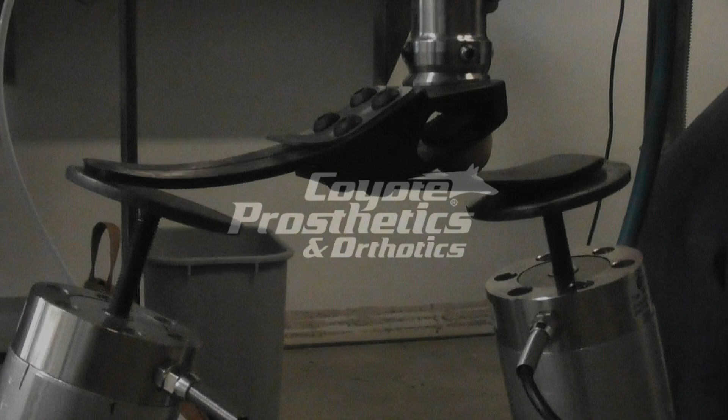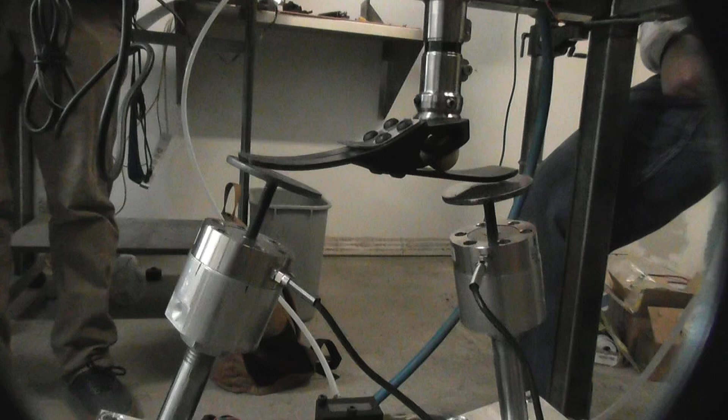Coyote Prosthetics, a Boise-based prosthetics manufacturer, needed an affordable solution for structural testing of prosthetic feet to meet ISO 10328 standards. These standards are vital to ensure the safety and durability of prosthetic devices, protecting against potential injury and litigation. Outsourcing this testing to third-party facilities was cost-prohibitive for the company, prompting the development of a custom-built testing machine.

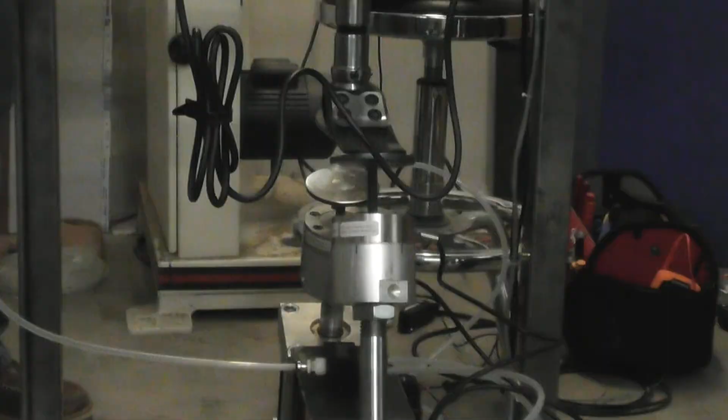This machine incorporates linear actuators to apply static and cyclic loads and uses a microcontroller with Arduino interface to log data on force and cycle count. The design offers a cost-effective in-house solution for testing various prosthetic foot sizes, significantly reducing testing expenses while enhancing operational efficiency.

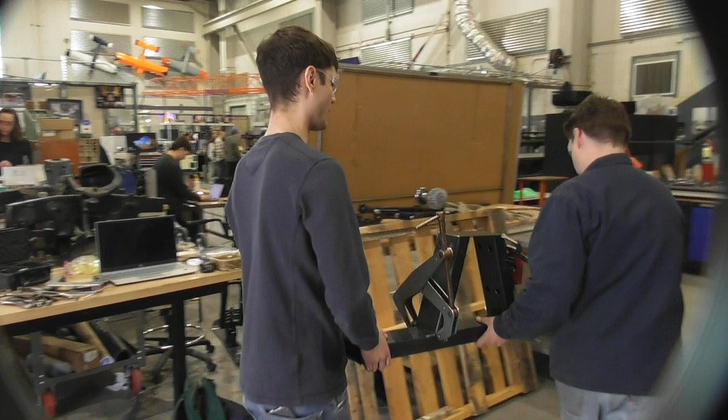To ensure durability over 2 million test cycles, we built the frame using welded steel box tubing, designed to withstand high vibrations and loading forces. Our design accommodates various prosthetic foot sizes and testing forces through multiple adjustable components. The mounting rod can be repositioned, the actuator stroke length is adjustable, heel and toe plates have multiple levels of adjustability.

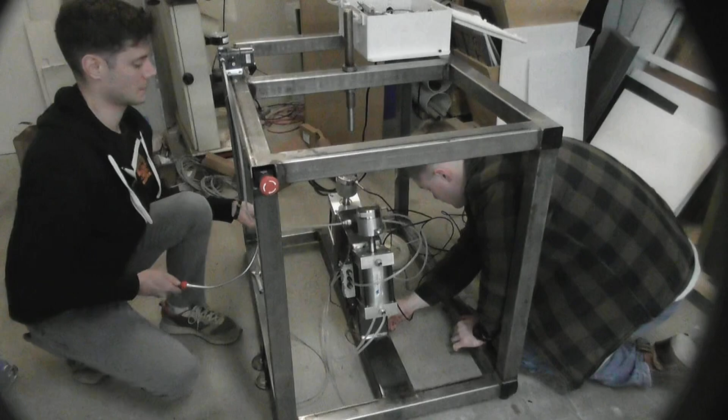Additionally, we designed the frame with extra space to prevent components from being crammed together, allowing for easier maintenance and adjustments. The overall frame dimensions are also within the size limits specified by our sponsor, Coyote Prosthetics. Our design implements an Arduino Opta PLC that allows analog control of our industrial components and supports feedback from onboard instrumentation such as the electronic pressure regulator and 2 piezoelectric load cells.

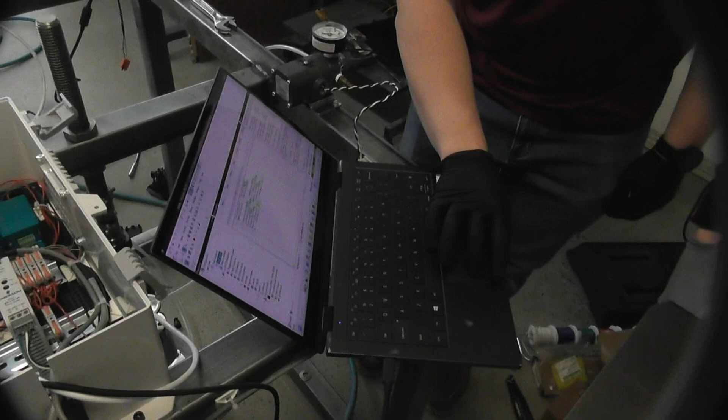To maximize the capabilities of an electronically controlled system, we additionally opted to use electronic double-acting solenoids to provide control capabilities to our pneumatic actuators. The selection of these components gives us the greatest flexibility to include data logging, precise control, and test validation throughout the life cycle of the device. The human-machine interface software, Ignition, grants the user the option for complete hands-off automation or more direct hands-on operation of the machine, depending on their preferred testing criteria.

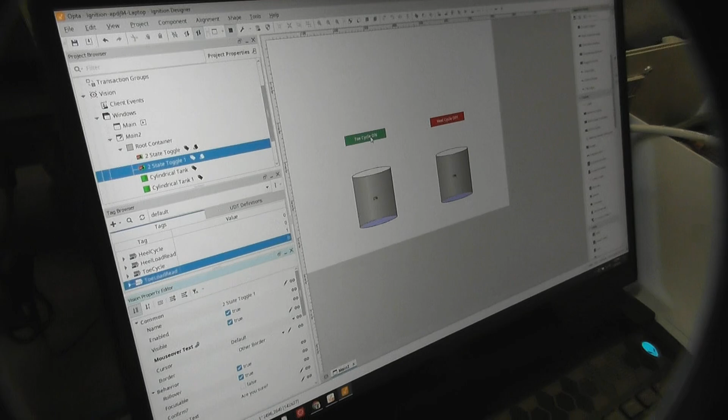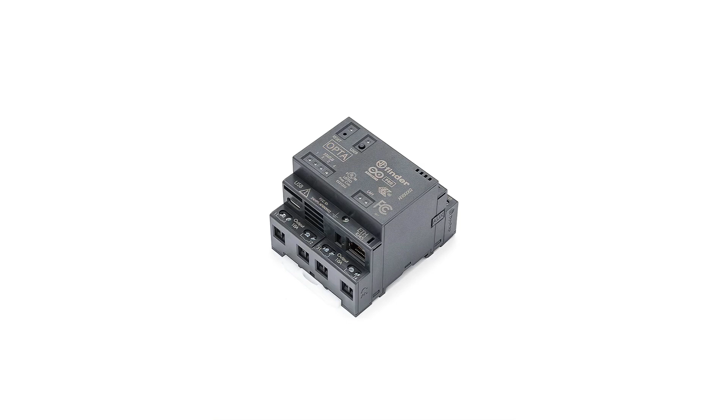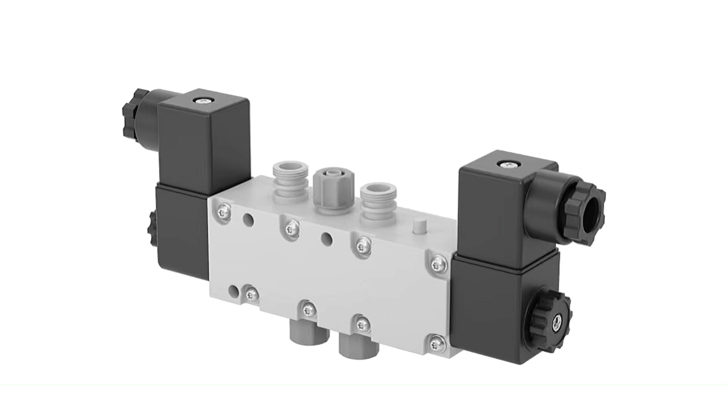Our main driving components that are able to make our device run consisted of pneumatic actuators, load cells, and an Arduino PLC, with of course additional supporting components. Pneumatic actuators provide forces that are applied to the prosthetic foot via compressed air. Load cells read and send the forces measured back to the PLC. Solenoid valves control the airflow to the pneumatic actuators by using an electrical signal to open or close the air supply, allowing for precise regulation of force application during testing.

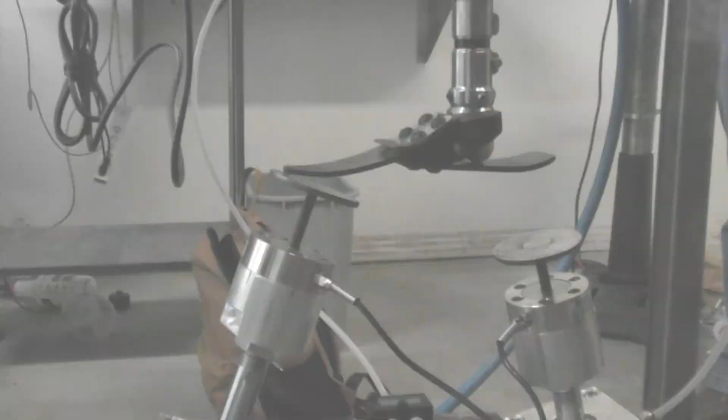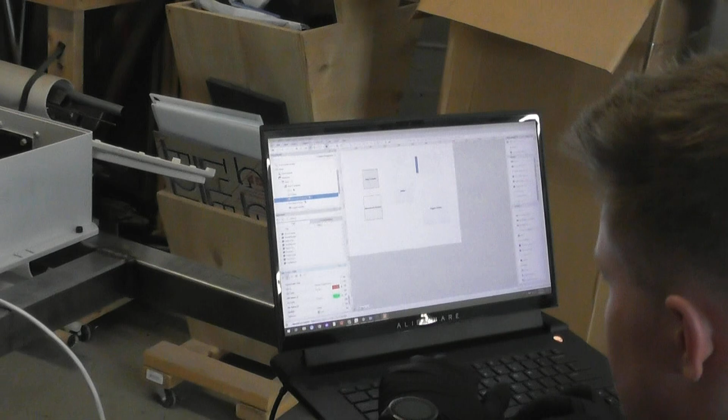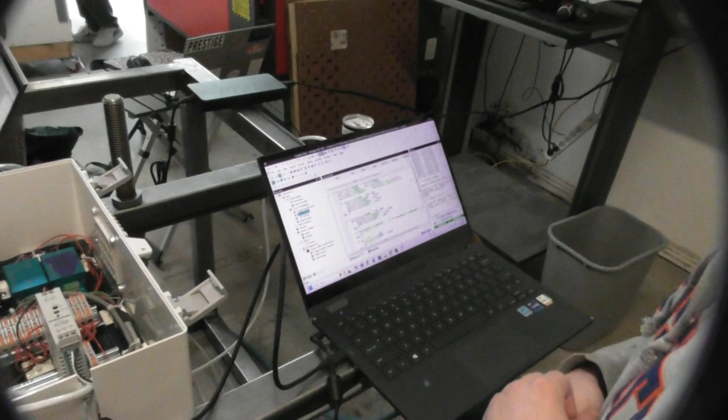Air regulator maintains a consistent and adjustable air pressure to the pneumatic actuators, ensuring precise force application for accurate and repeatable prosthetic foot testing. The Arduino Opta PLC with an analog extension, paired with Ignition for a human-machine interface, creates a powerful and flexible automation solution. This PLC delivers reliable control with digital and analog I/O for seamless integration. When combined with Ignition's web-based HMI, users gain interface monitoring, remote access, and control. This setup ensures efficient data tracking, actuator management, and alarm handling, making it a high-performance solution for industrial automation.

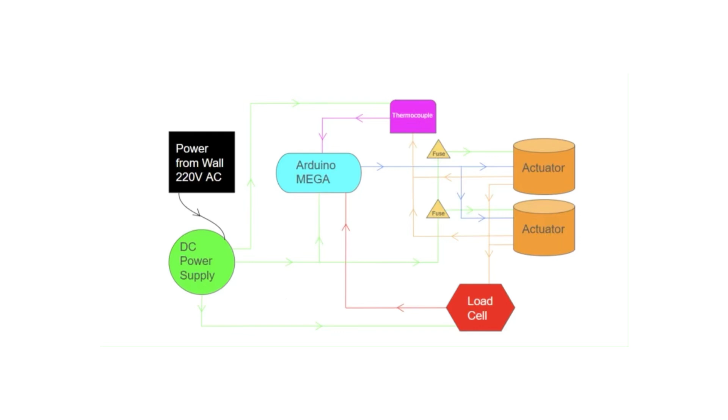When integrating load cell amplifiers into our system, we ensure precise and reliable force measurement, feeding accurate data to our PLC for real-time processing. These amplifiers transfer a millivolt signal generated by the load cells into a voltage that is readable by the PLC. A stable power supply is critical, guaranteeing consistent performance without signal fluctuations.

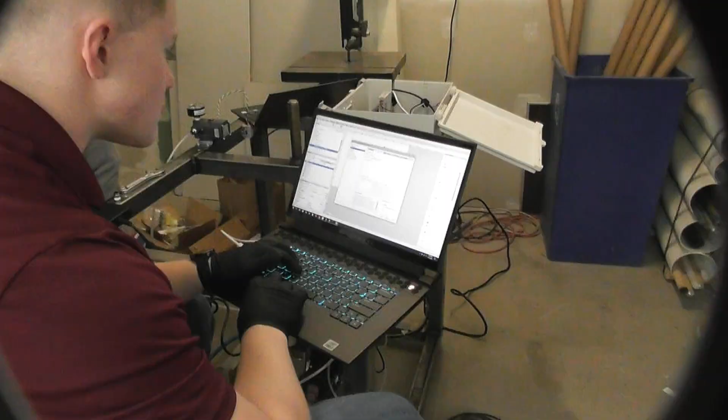Safety also remains a top priority, which is why we've incorporated an emergency off button. In the event of an unexpected situation, this instantly halts actuation and testing, protecting both the user and surrounding personnel. In the event of our emergency power button being hit, all of our data is saved on both the PLC and Ignition as well. Our system is designed for precision, efficiency, and above all, safety.

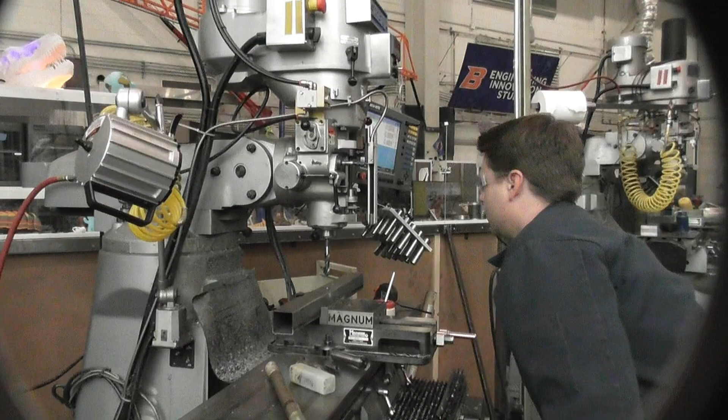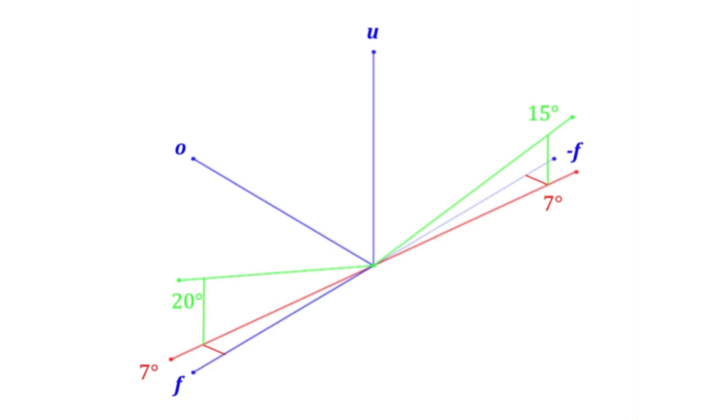To ensure a precise and sturdy frame, we welded steel tubing while maintaining strict tolerances within 0.2 millimeters and 0.2 degrees. We exclusively used machine shop tools like the bandsaw, mill, and MIG welder to achieve accurate angles for the heel and toe actuator supports. CNC milling was used to ensure the holes were precisely drilled in the correct position and depth. The ISO document ensures safety and highlights that the test must conform to high standards, obtaining data within the allowable degrees and measurements set forth by ISO.

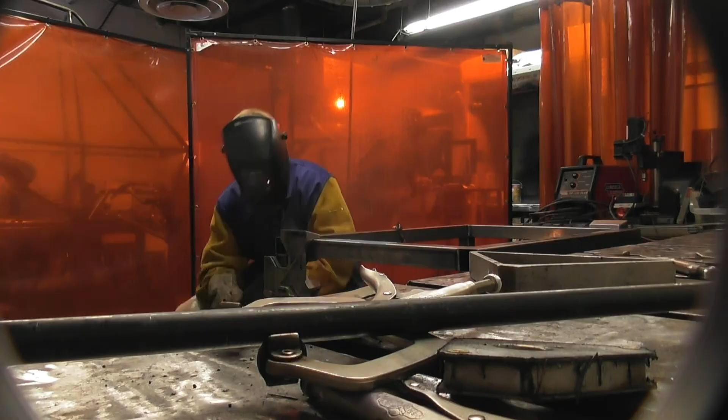Accuracy of manufacturing methods was immensely considered. Our actuator supports presented a lot of importance for accuracy of the project. Cutting accurate angles took a few tries. Metal distortion was a major concern that would cause inaccurate dimensions and angles, especially at the actuator supports. To avoid major expansion and contractions, jigs were incorporated within the pre-welding process. Testing assemblies were made to fine-tune welding and fixturing.

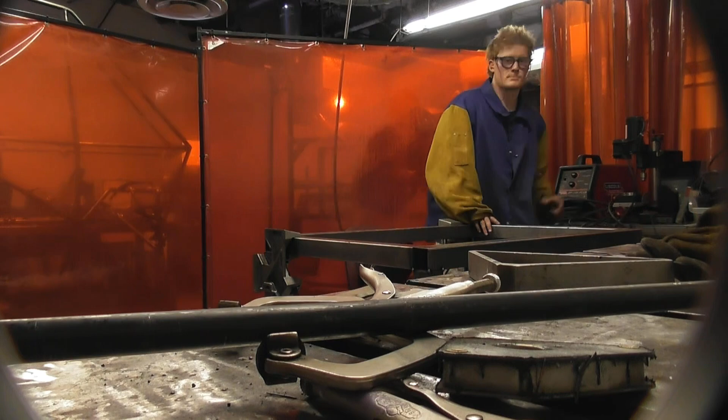The final product took a few tries, but our team was persistent and was able to meet ISO 10328 tolerances without requiring more material to be ordered from our sponsor, and scrap was utilized from the machine shop to further avoid additional costs.

We encountered a challenge when integrating our load cells, as we initially struggled to process the 5-wire analog signal properly. The load cells work by generating an electrical signal when placed under mechanical stress. This is done by a quartz crystal that is within the load cells and many alike. The electrical signal generated is too small for our system to recognize. The amplifiers we found give us a plug-and-play solution to read the signal from these load cells.

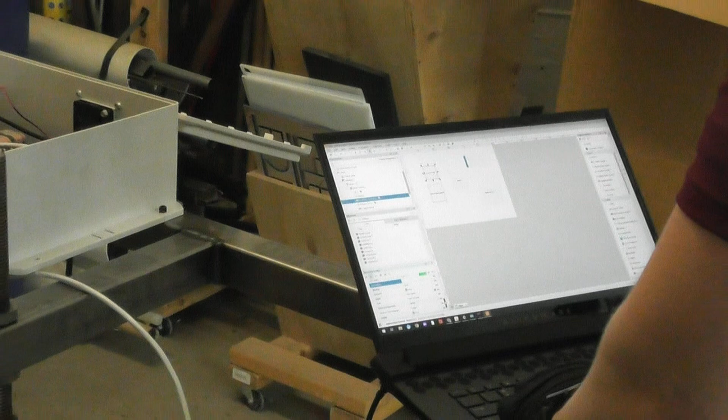Now we'll demonstrate the device in action. First, the operator loads the test sample into the device by sliding the collar over the support shaft and tightening the set screws. The operator will then initiate the test cycle via the interface, either utilizing the fully automated controls or via the manual override operation.

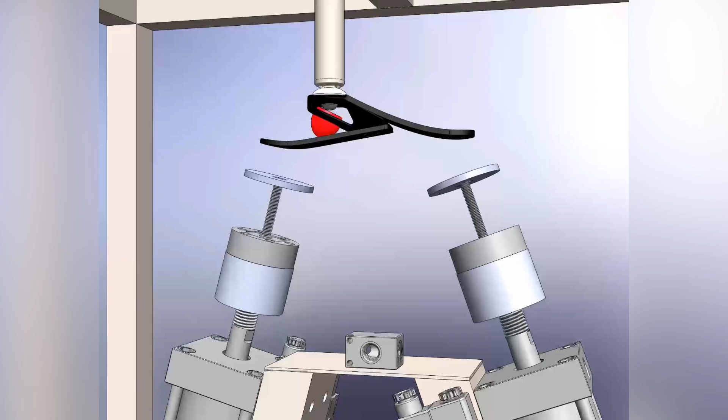If automated control is selected, the device will conduct a cyclic test of the sample in compliance with our ISO standard, ISO 10328. You can see here the smooth operation of the pneumatic actuators, fully able to meet the functional requirements of the ISO standard. In the event of device malfunction, part failure, or other catastrophic unplanned events during testing, the operator should use the emergency stop button, or EMO, to immediately cut power to the device, halting the operation of the test and movement of the actuators.

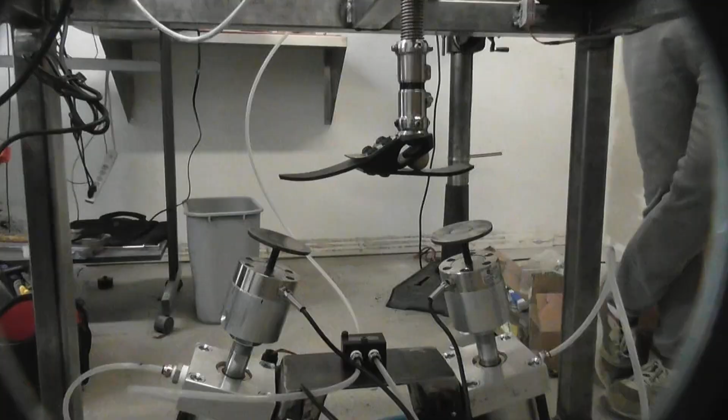We are incredibly proud of this project and how it brought together everything we've learned in our mechanical engineering education, from structural design and machining to electronics, coding, and pneumatics. This was truly a unique and specialized project, giving us hands-on experience solving real-world engineering challenges.

A huge thank you to Coyote Prosthetics for this opportunity. Their support allowed us to develop a machine that will improve their testing capabilities while giving us invaluable experience applying our skills in a meaningful way. This project was the perfect culmination of our time at Boise State.